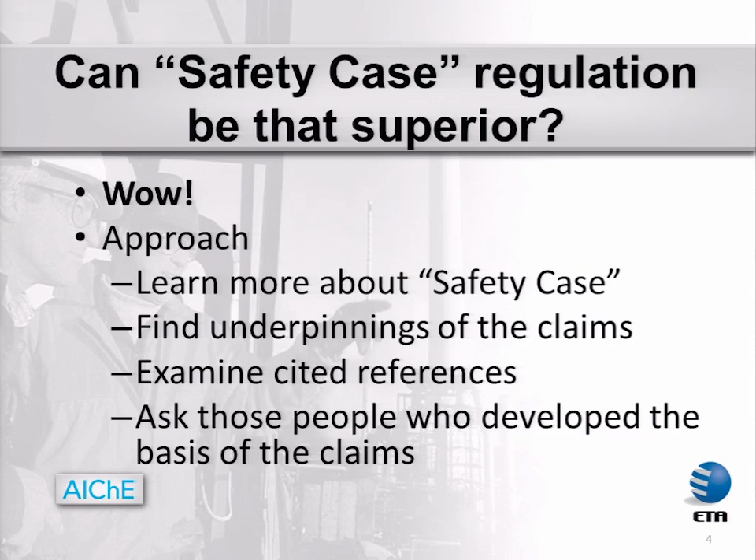And so my challenge at this point was, let's take a look at this. And first, learn a little bit more about the safety case, tickle and find out the underpinnings of the claim. Why was it stated that way? Examine the references that were cited, and then ask those people who developed that, how did this happen? Give me a little more information, if you will, please. And so that's what I undertook then in preparation for this talk today.

The next 4 slides then deal with safety case. You had a good presentation moments ago about PSM, so I'm certain that everybody here is very familiar with our PSM standard in the United States. But safety case, I'll give you 4 quick slides to highlight what I think are important features of the safety case regime. I'll skip ahead and say in reality, there's not that much difference in the two, but be that as it may, let me go ahead and talk to you for a moment about safety case.

I think safety case, particularly in the North Sea, offshore, really came about as a result of Lord Cullen's inquiry into the disastrous Piper Alpha explosion that was spoken about earlier, in which I think it was 167 people tragically lost their lives. That platform had just a sequence of events, all of which led to the complete destruction of the platform offshore in the UK waters.

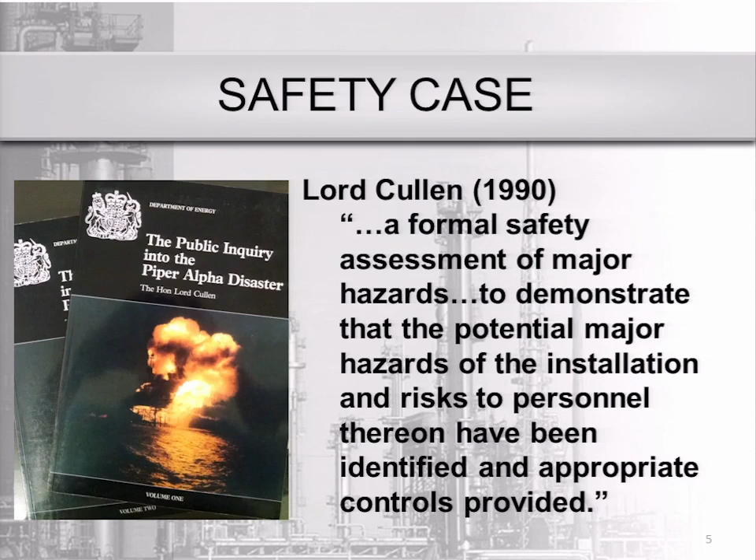And Lord Cullen, in his subsequent follow-up, an excellent 2-volume report, by the way, and I commend it. It still stands, I think, as one of the key documents of how to go about managing complex hazardous systems well. He said this: a formal safety assessment of major hazards to demonstrate the potential major hazards and risks to personnel have been identified and appropriate action taken, appropriate controls provided. That's how he summed up what a safety case is.

He went on to say this: operators, that is the entity that owns the hazardous operation, should be required to demonstrate this to a regulatory body, and it's inappropriate and impractical for the regulator themselves to undertake detailed auditing of the operator's compliance.

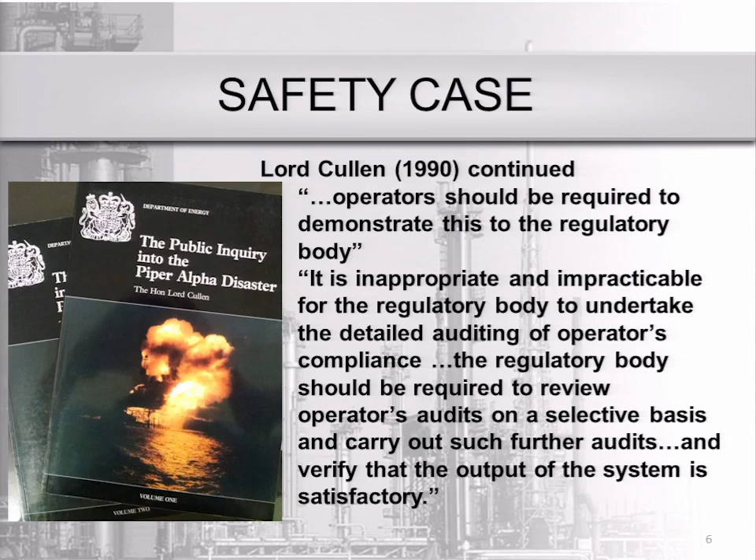Instead, that regulator should look at the operator's audits of themselves, and if there's something found to be questionable, then a more detailed audit can be undertaken by the regulator. So that's kind of the nature of safety case.

It requires workforce involvement, of course, and then a general duty of care imposed on the operator, that is, in most cases, to make certain that it's so-called ALARP, as low as is reasonably practicable, ALARP, A-L-A-R-P. So that's the general duty.

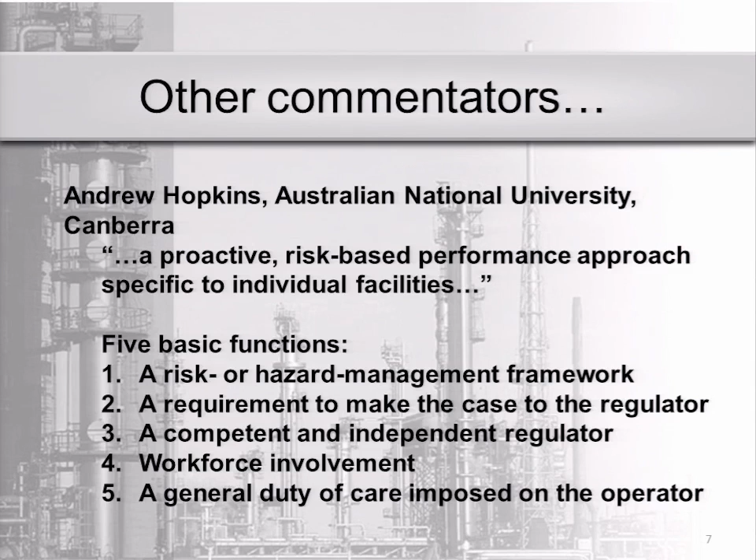Another commentator, Nancy Leveson, professor at MIT, describes safety case in the following: it's a structured argument for why the system is safe, and she says, I thought interestingly, there are 2 types of regulations. She divides them into 2 camps: prescriptive regulations, such as we see with FAA, particularly civil aviation, and then performance-based or goal-setting type of regulation that would characterize the safety case. I would also assert in many ways it characterizes PSM.

So that's a little bit about safety case. You have to put a case forward to the regulator. The regulator has to be competent to look at it, pass judgment on it, or at least stand silent, not object, and one would go about then implementing a safety case protocol or procedure for regulating that operation.

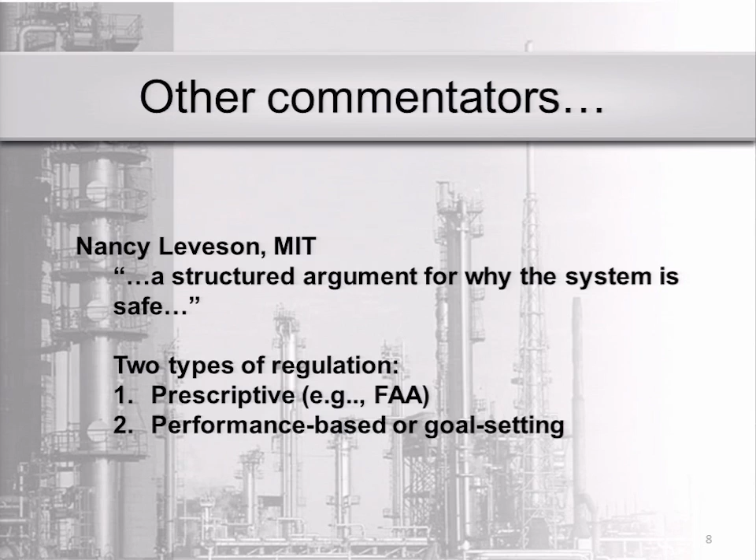And in that paper, they point to a 2013 University of California, Berkeley report to the governor of California that was conducted by a group that went around the state and listened and came forth with some recommendations on how to go about implementing oversight of refineries in the state of California.

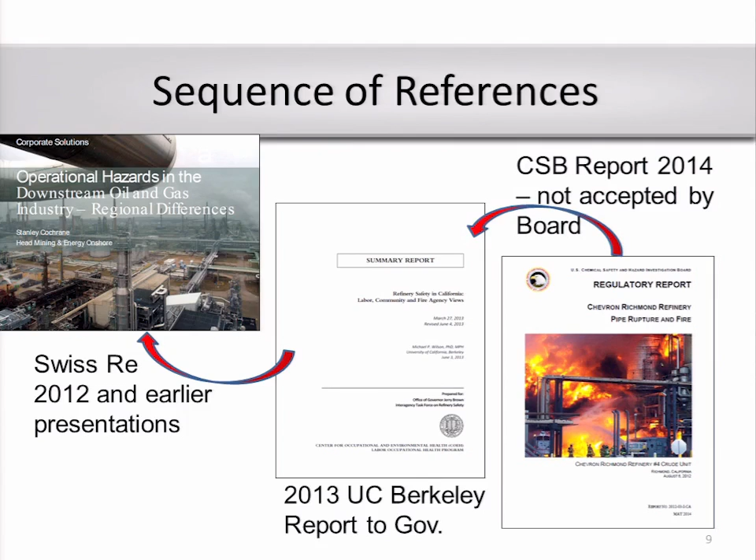And what they did was point backward to Swiss Re, the reinsurance operator, the second largest, I guess, in the world, who have been on record putting forth certain statements. And from those statements, the UC Berkeley folks said safety case regulation is 3 times better than other types of regulation. I'll show you how that came about.

What I actually did was go ahead and dig down in the footnotes and find the name of an individual who actually wrote those Swiss Re reports, a fellow named Ernst Zirngast, and I called him up one day in August. I said, Mr. Zirngast, would you mind telling me how this information came to pass? I'm really interested, and I want to see how it happened that you came forth with this information and what it's based on. He was happy to communicate with me.

His first reaction, when I introduced myself and said I'm just a fellow in the U.S. and I want to know a little more about this, was, "Oh dear." I didn't want to cause him any anxiety, so I said, "No, I want to write a paper, I want to explain what I'm learning here." And he then loosened up and was able to communicate and tell me a little bit about what the basis was.

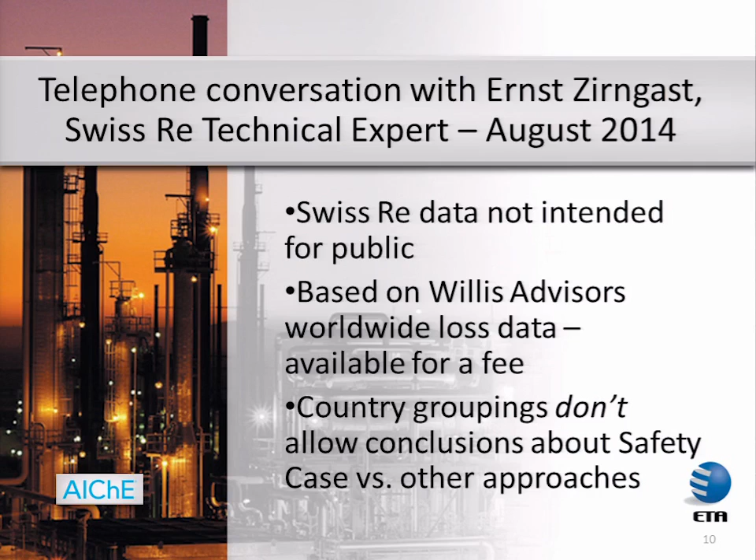He pointed to some data from Willis Advisors, a company that claims to aggregate loss claims around the world. And unfortunately, that's available for a fee that I wasn't willing to pay. But in any case, what Swiss Re did was take that data, think that it represented worldwide data, and they grouped different countries to allow conclusions to be made.

And what they came up with were 4 different groupings. Mr. Zirngast called the first one the Anglo group. And CSB later took that to mean the USA. And by that, they took that to mean the PSM regulation.

But in point of fact, the Anglo group actually has half of the roster, half of the 4 groups up there that use safety case regulation. UK, Australia, and one of them, the US, uses PSM, and to a certain extent Canada, somewhat like a PSM regulation. The second, third, and fourth groups were the EU group, that is Europe, Singapore, you can read those, but it also includes Saudi Arabia, the Gulf states, and Egypt.

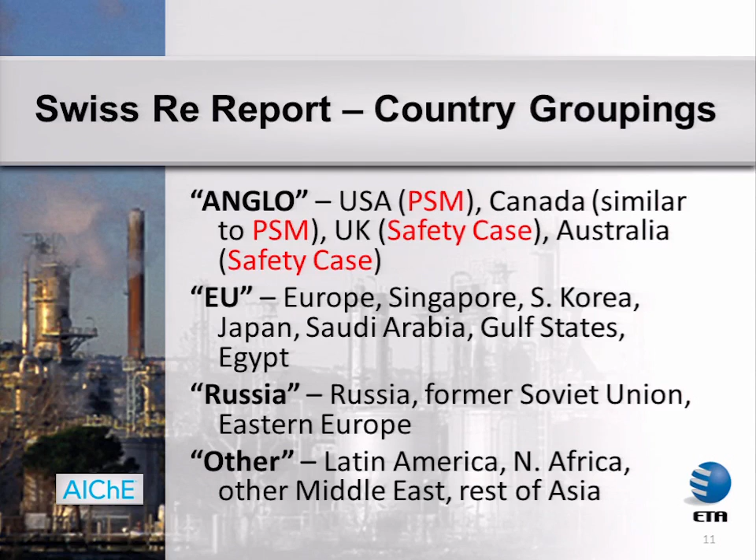The rest of the Middle East is in the 4th category down there. And then Russia's the 3rd group there that constitutes Eastern Europe primarily. That was his cluster of 4 different groups, and what he then did was look at their losses.

I hope you can read these numbers, but during the period 1985 through 2006, that is the 4th column over, you can see the loss burden, or the number of losses, and then finally on the rightmost column, the actual loss burden, millions of dollars, in 2 things: business interruption, property damage. $980 million was in the Anglo group, $350 million in the EU group, 15 in Russia, and 260 in the other.

You can see it adds up to $1.6 billion in losses over that 21-year period, which seemed kind of low to me, but nonetheless, I think we'll see in a moment, it is low. It really is not anywhere close to a full compilation of worldwide data. Nonetheless, those top 2 numbers, 980 and 350, are where the threefold improvement came about. That assertion that the Anglo, or the US, loss record is 3 times worse than Europe. So you can see it's based on that data right there.

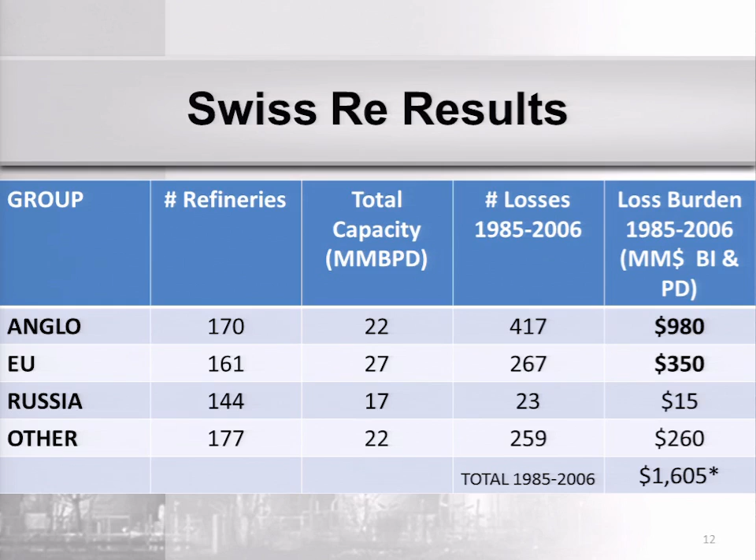Having said all that, I thought, well, this doesn't get me where I'm going with regard to comparing USA PSM to safety case. That's what I had heard was the issue, and that's why safety case was so rigorously put forth as a good way to regulate hazardous materials. I don't find that to be the case. So then what was I able to do?

I had to look for other sources of information, and the one that I really spent some time looking at in particular was Marsh & McLennan's 100 largest losses for the period 1974 through 2013. That's an excellent document, and I commend it to those of you in the process safety business because it helps us not lose that institutional memory, because it really talks about the losses that are serious and severe. Piper Alpha, of course, or I think that might be BP Macondo featured on the front there.

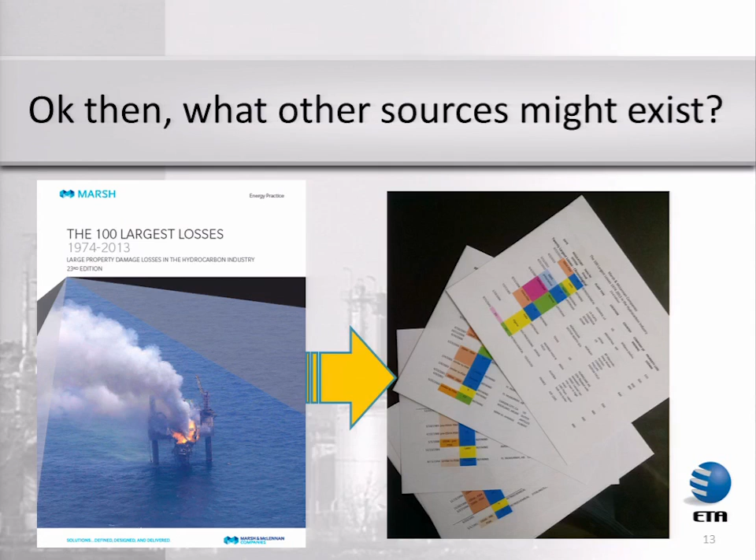I tabulated the data. I put all kinds of different columns together and tried to make sense out of the data that was presented, and then I came up with 3 charts that I'll share with you right now. We'll see if I get any kind of a reaction from you.

Of the 20 largest losses, 13 of those occurred since 1992. I picked 1992 as kind of the date on which we in the US have PSM, folks in the UK and Europe, Australia had safety cases, and so I started to look at data from 1992. Of the 20 largest losses recorded by Marsh & McLennan, and by the way, they extrapolate those cost numbers, 13 of them have occurred in that 22-year period.

The 3 that were shown in blue on the top right quadrant, OSHA PSM, would be Williams Olefins, a hurricane in the Gulf Coast, and Kuwait. The one in the red on the right side is what I call a prescriptive regulation, that is Minerals Management Service and BP Macondo. Down on the bottom right, in that greenish color, there are 3 there that represent Ekofisk in Norway, a French explosion, ammonium nitrate as it turns out, and a gas plant in Australia.

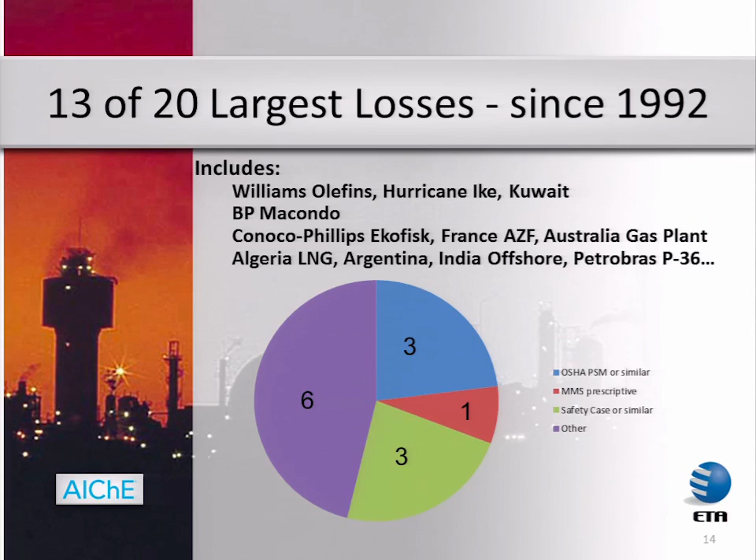And then finally, over on the left are 6 that come about from everything else. I really didn't know just exactly what the regulatory regime in Argentina looks like, frankly, and I didn't have the time to really track it down well. But many of those are Latin American, Petrobras, as you can see. In any case, comparing OSHA PSM to safety case, there's really no net conclusion from that particular graph, so I can't come up with a conclusion there.

If I look at refining, it's a different story, though. Here again, these are such small numbers that I'm not sure that one can come up with a robust answer, but since 1992, of those 100 largest incidents by Marsh & McLennan, 26 of them involved refineries. And of those 26, 12 were regulated under the PSM standard. It included, as you can read, 3 from California, 3 in Texas, 2 in Mississippi, and so forth.

3 in Canada, all of which were tar sands. And again, Kuwait. 2 with safety case, Singapore and UK incident. And then again on the left, all others, Italy, Japan, France, Argentina, and so forth. Here, you can see 12-2. That sort of suggests there may be something there with regard to refining, but I'm not certain that it really tells us that much.

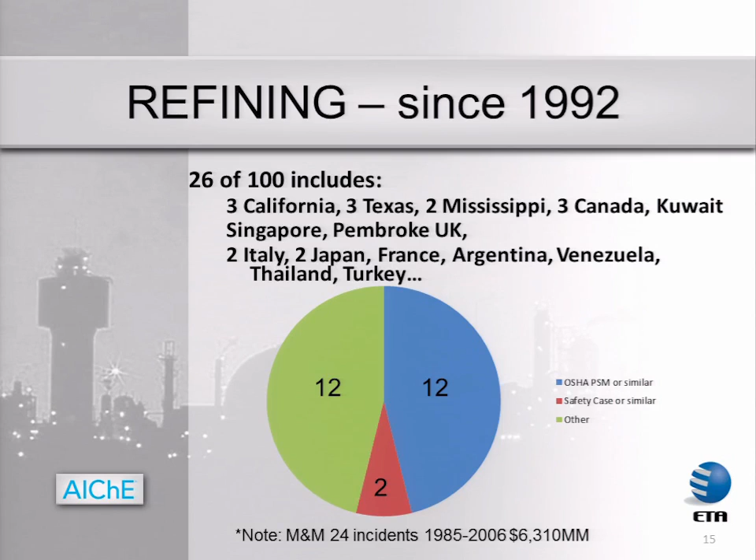I do know that of that 12, 2 of them, or maybe 3, were related to hurricanes or weather events. So is that a PSM regulated issue? It's debatable, but if you take away 3 from 12, then you're left with 9. The whole point is we're dealing with very small numbers here anyway, so it's hard to get a good answer. But in any case, there may be a glimmer of a suggestion that at least in refining, those of us in the PSM world may have ways to improve things.

Finally, I look at offshore upstream, that is oil and gas production offshore. And here again, the picture is decidedly uncertain. 4 incidents happened in the Gulf of Mexico, including Macondo. That I characterize as Minerals Management Service prescriptive. 4 of them occurred in regimes managed under safety case regulation. You can read what they are, Ekofisk, Australia, and leaking risers and so forth. And then again, 7 in Egypt and Venezuela and India and so forth, which I really couldn't characterize.

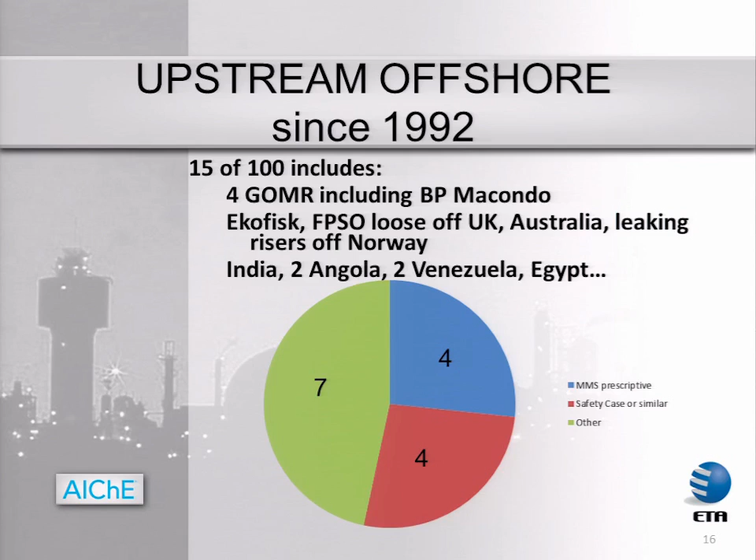In any case, I come up with no good answer there comparing Minerals Management Service prescriptive regs to those in safety case regulation. So in conclusion, these are what I believe the data tells me. We've got very small numbers here. One severe incident skews things dramatically, so it's difficult to come up with a good answer.

Swiss Re, the data on which CSB hung their hat in the Chevron Richmond report, I don't think withstands scrutiny. The Swiss Re data is clustered in such a way that you cannot get any good information out of that particular set of information. So I discount that.

What we do have with regard to the Marsh/McLennan data is not normalized with regard to the number of refineries. We compared 12, as you recall, incidents under PSM versus 2 in safety cases. I don't know if there's 6 times as many complex refineries under PSM as compared to safety case regulation or not. So it's not normalized.

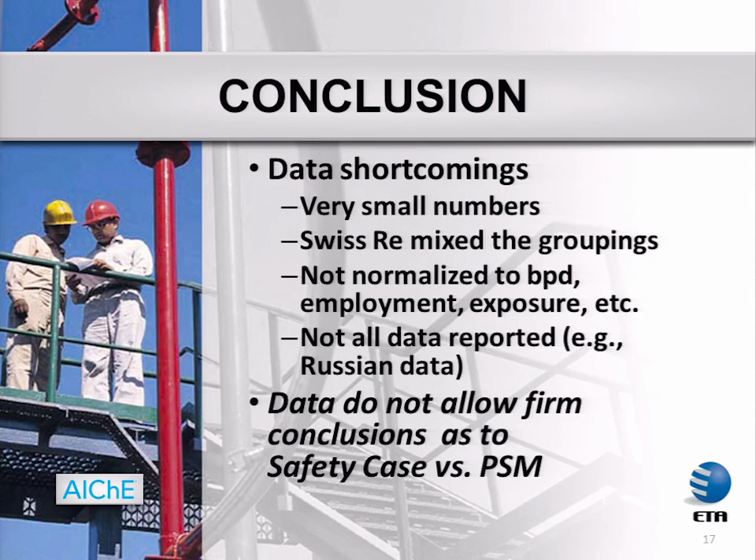Not all data is reported. You can see, I think it was a grand total of $15 million in Russian losses, and off the top of my head, I'm not sure that's right. And then finally, the main conclusion: the data don't allow firm conclusions to be made as to the crucial issue that I set forth, safety case versus PSM.

Finally, here's my suggestions. There's no magic answer. There can't be. Those of us in the business are working hard to use the regulations under which we operate, but it comes about not through compliance with the regulation necessarily, but from the second point there, hard work and scrupulous attention to the best practices set forth by groups like CCPS. And there are exemplars that exist, and I call these particularly to your attention.

Nuclear submarines, as Professor Leveson is fond of reporting. She says, take a quick look at a nuclear submarine. They are operating in very severe environments with high hazards, and yet for 48 years, I believe it is, they've had 0 upsets, 0 tragic incidents in the U.S. nuclear submarine business. Prior to the implementation of their present management of safety, they would have about 1 tragic submarine incident a year, and they transformed that such that today they have 0 in 48 years. So it's, I think, worthy of examining what they do.

Finally, I point to the U.S. Nuclear Regulatory Commission. I think we in the chemical industry have a lot to learn from the way the U.S.